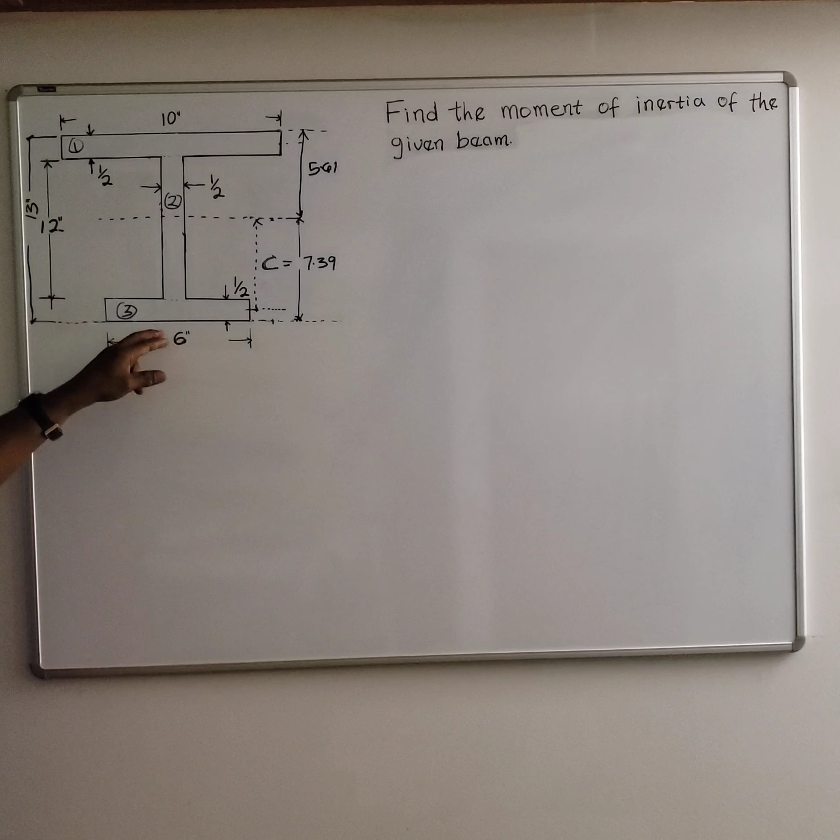And we noticed that the centroid along the y-axis is not in the center of the height of this beam because the beam is not symmetrical along this height. But along the x-axis, the centroid is symmetrical. The centroid is right in the center of this beam.

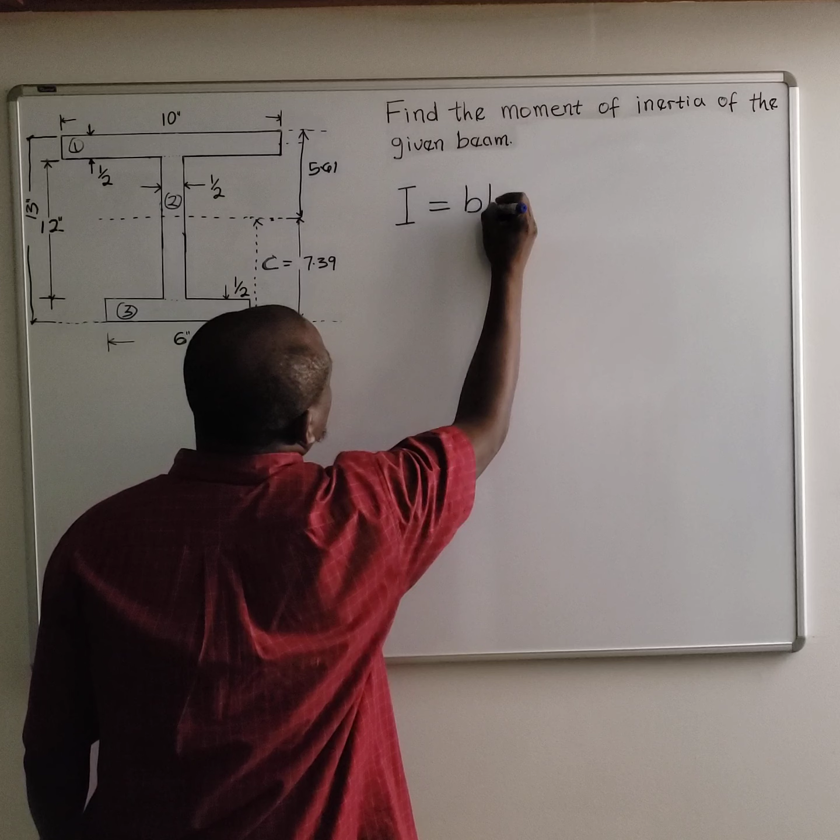As a result of that, we went through the whole procedure to calculate the centroid along the y-axis, and we are going to need that centroid to calculate the moment of inertia. We have three rectangular shapes that form this beam. We know the formula for moment of inertia for a rectangle is BH^3/12. So for a simple rectangle, that's the formula you need.

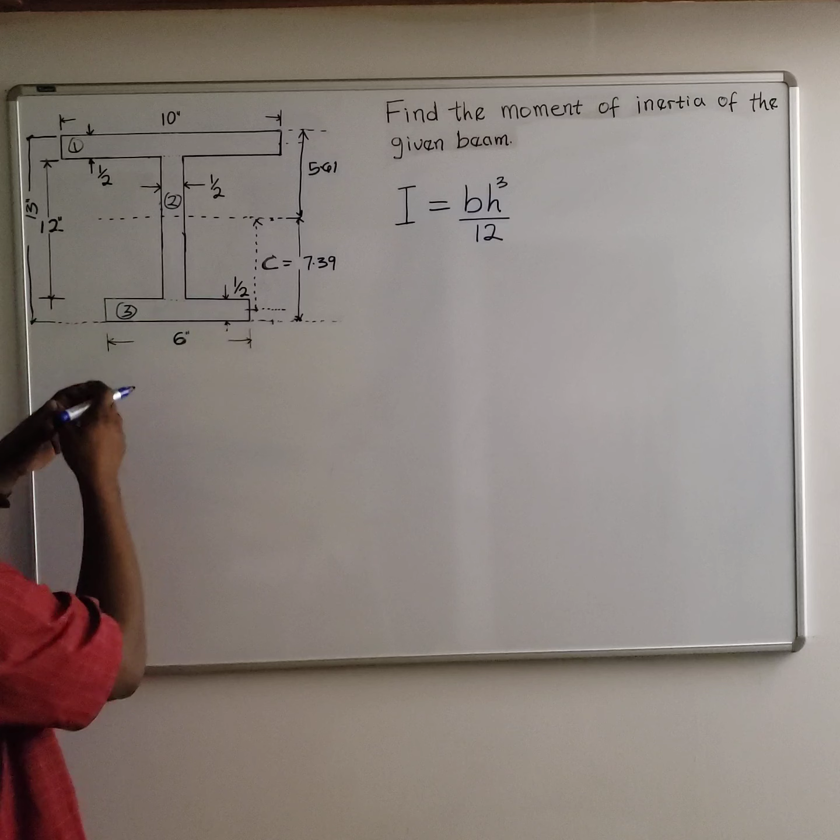But because we have a composite shape that is not symmetrical, we have to delve into a theorem called the parallel axis theorem. It says the area of a shape multiplied by the square of the distance between the overall centroid and the centroid of the particular shape. Since we already know the overall centroid as 7.39, we want to calculate the D for each of these shapes. Let's do that very quickly before we move forward.

For our first rectangle on the top, the centroid of this shape from here is 12.75 because the overall height is 13 and this is ½ inch. Half of this ½ inch is 0.25, so you subtract 0.25 from 13. That is 12.75. Now that 12.75 is greater than this centroid, so you subtract the centroid from that value. So D1 will be 12.75 minus this value, and that will give you 5.36 inches.

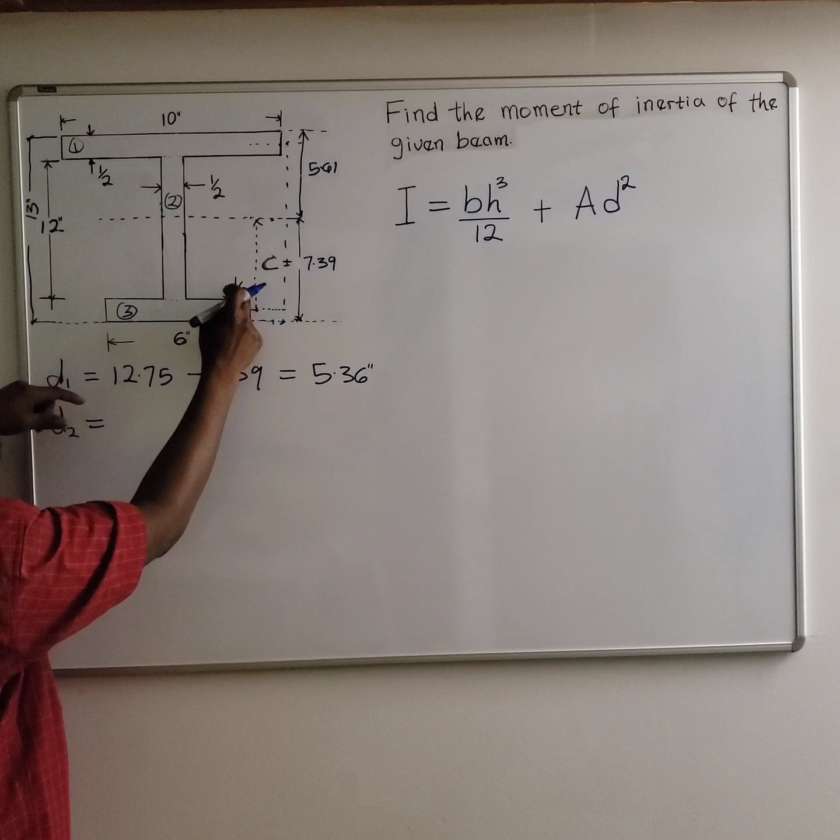For our D2, that's the second rectangle. The centroid of this shape from the bottom is 12 inches divided by 2, that's 6, plus this ½ inch, that is 6.5. So 6.5 minus 7.39, you are going to have negative 0.89.

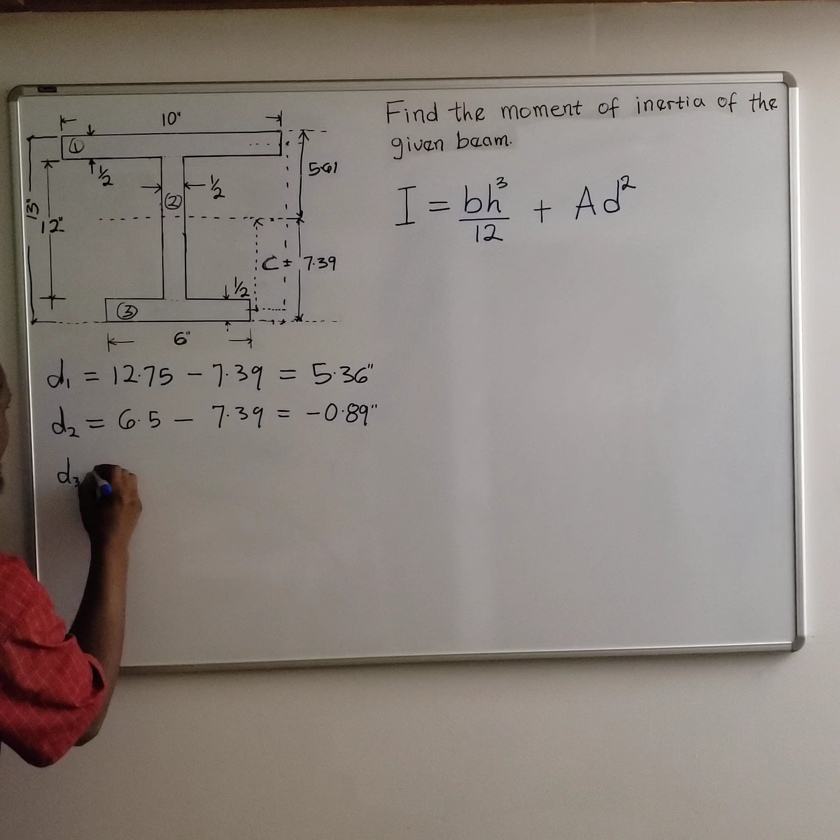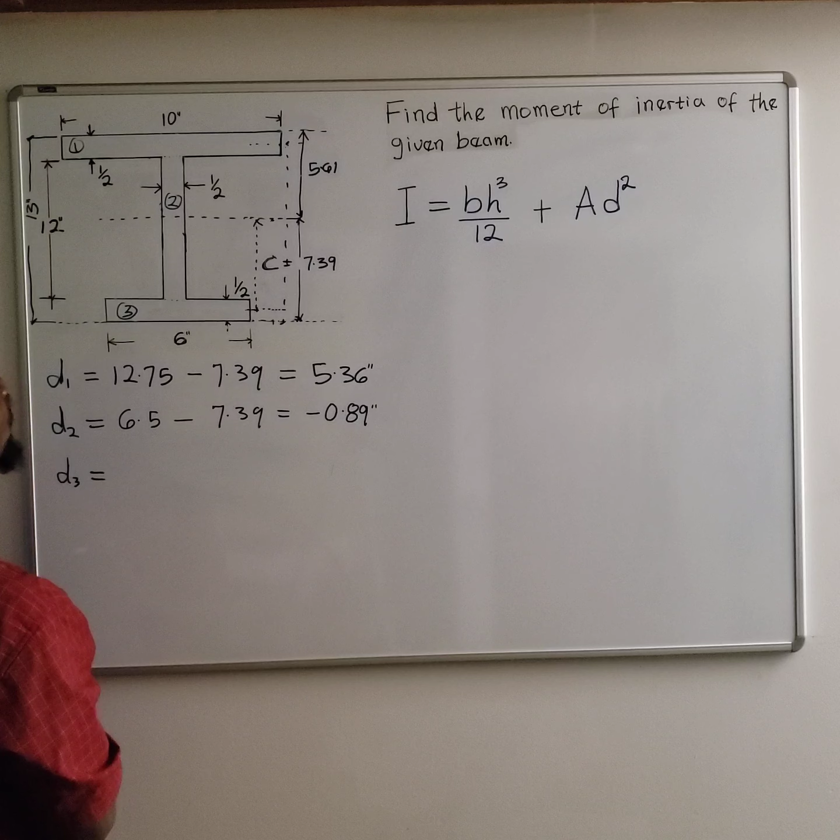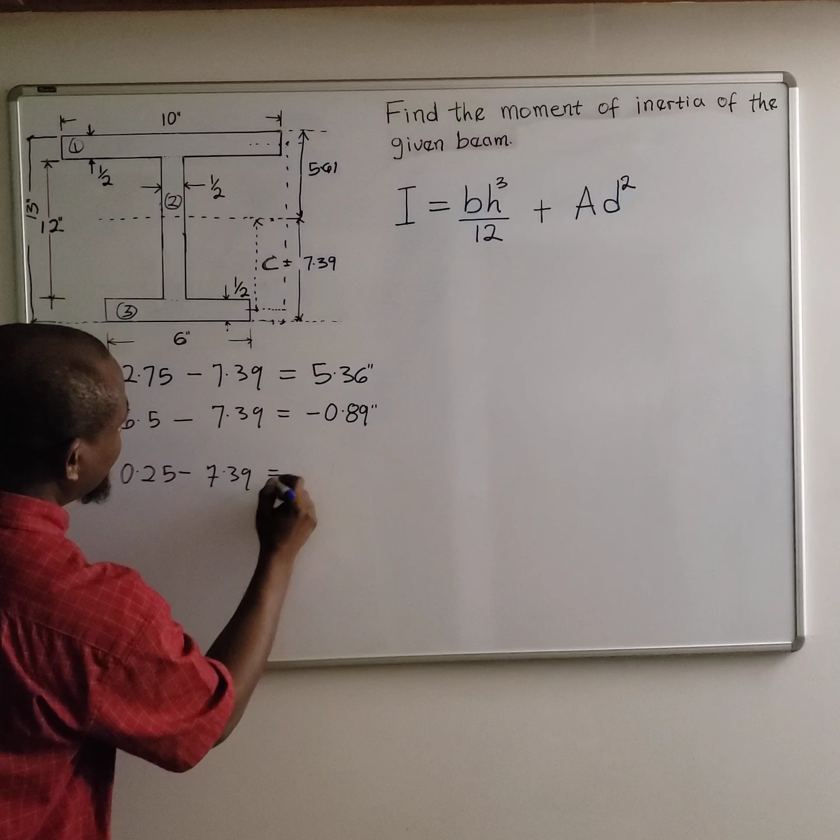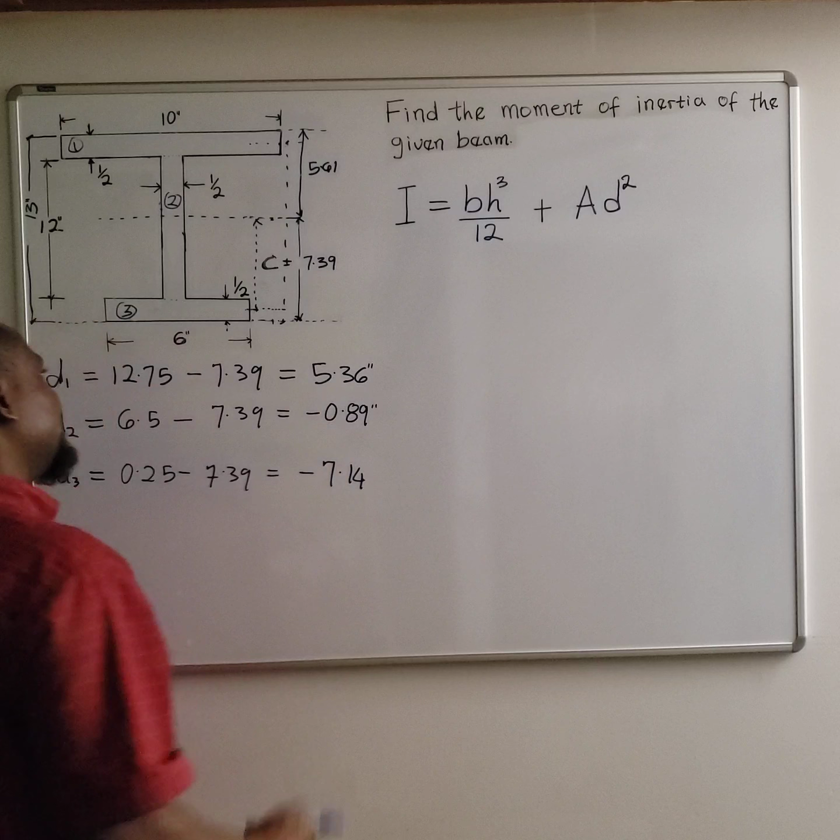And then for our D3, this is ½ inch, so to the middle of this rectangle that will be 0.25. So 0.25 minus 7.39, we are going to have negative 7.14. Now don't worry about the negative. As you can see, the distance d is squared, so when you square it, the negative signs disappear. So we know what those values are.

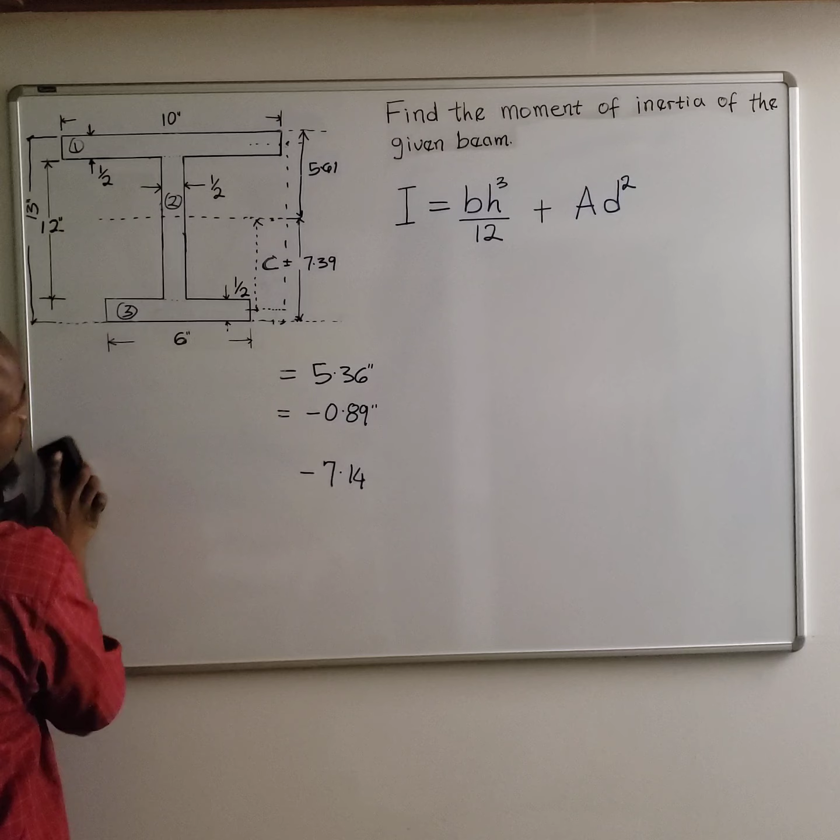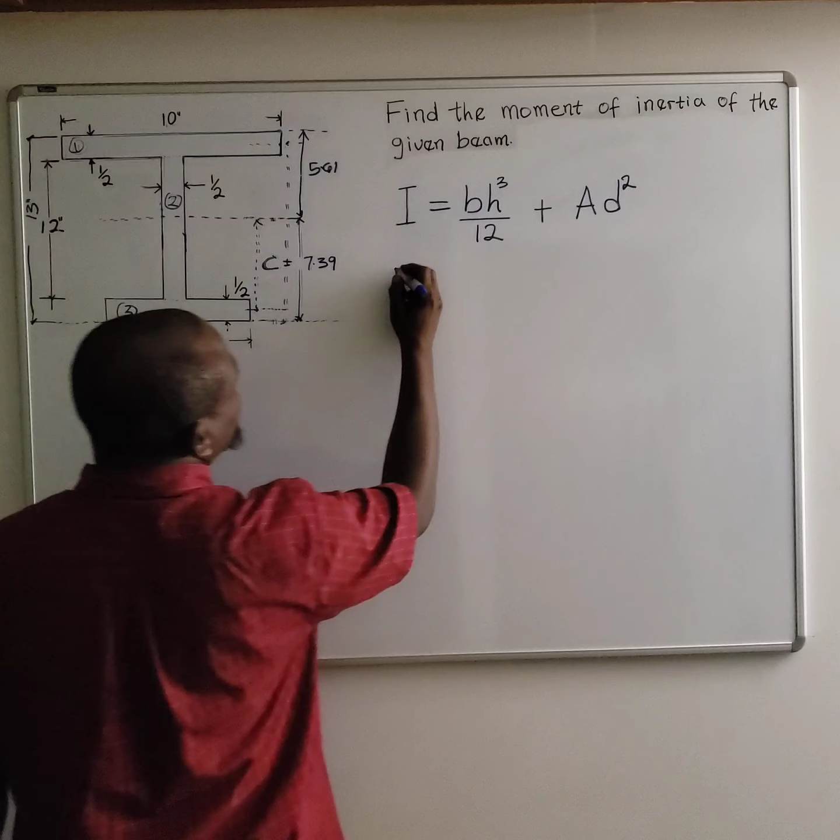We're going to need those values to calculate our moment of inertia. Just bear these values in mind. The total moment of inertia of this shape will be the sum of the moments of inertia of the individual shapes: I1 plus I2 plus I3. So let's start with our I1.

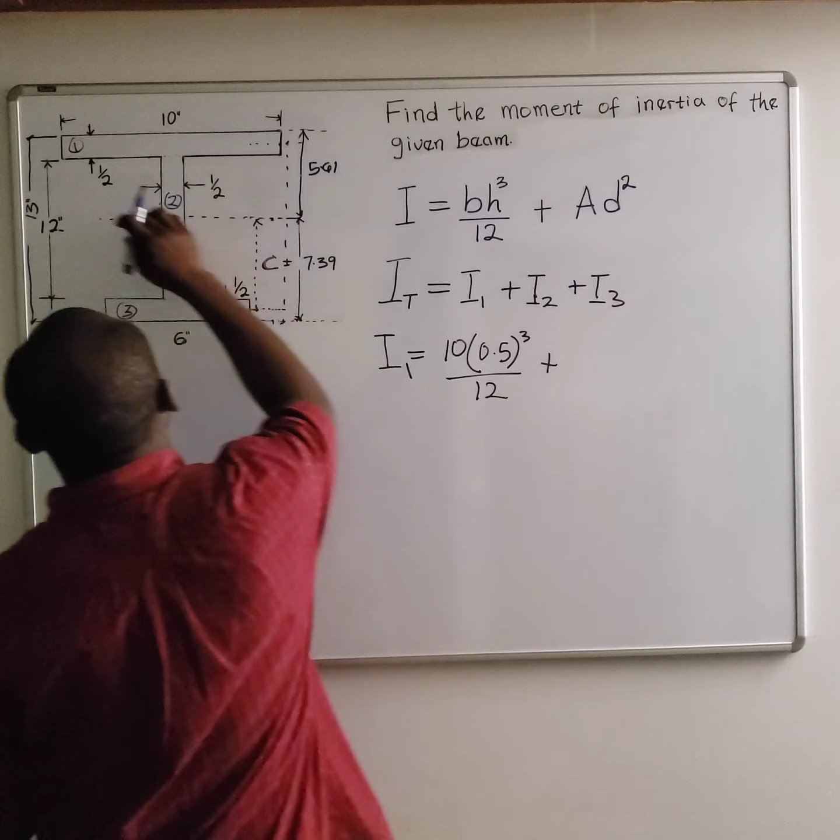You plug your values into this formula. Our B is 10, multiplied by h, which is half inch, raised to power 3, divided by 12, plus our parallel axis theorem. The area of this rectangle is 5, because 10 multiplied by half inch is 5. We already calculated D1 to be 5.36. You square that.

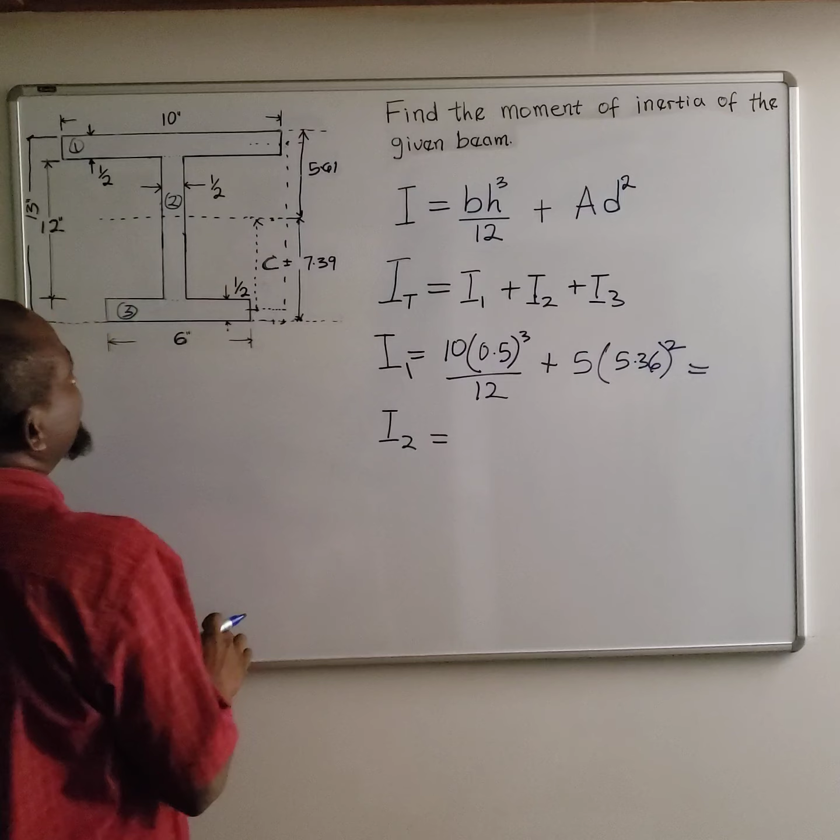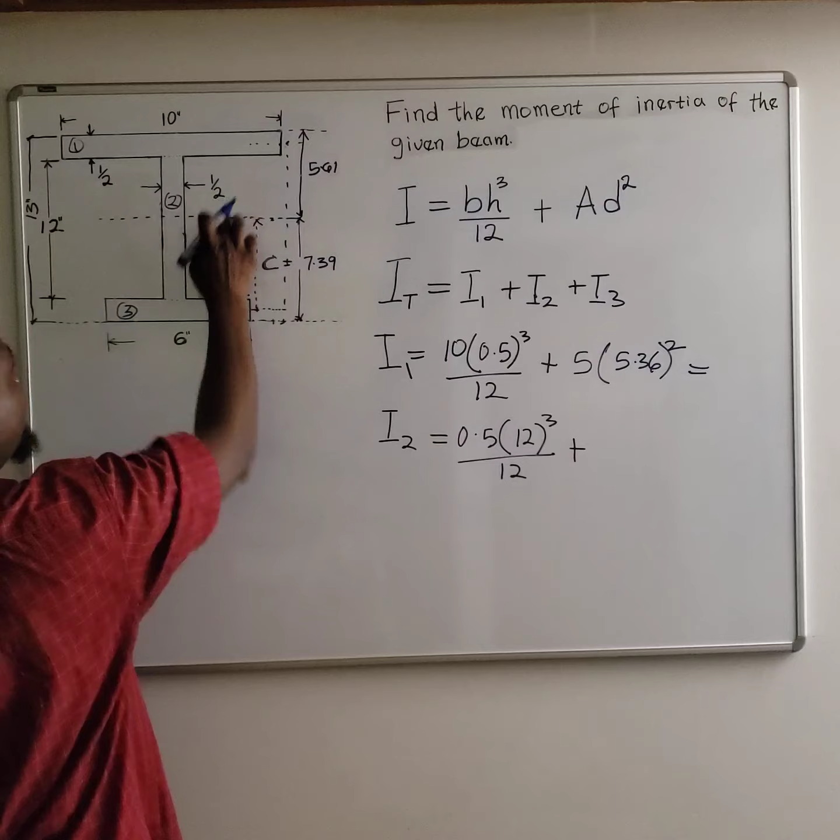Then our I2 will be: our B is half inch, 0.5, multiplied by the height of this rectangle, which is 12, raised to power 3, divided by 12, plus the area of this rectangle, 12 multiplied by half, that's 6. And we calculated our distance D as negative 0.89. You square that.

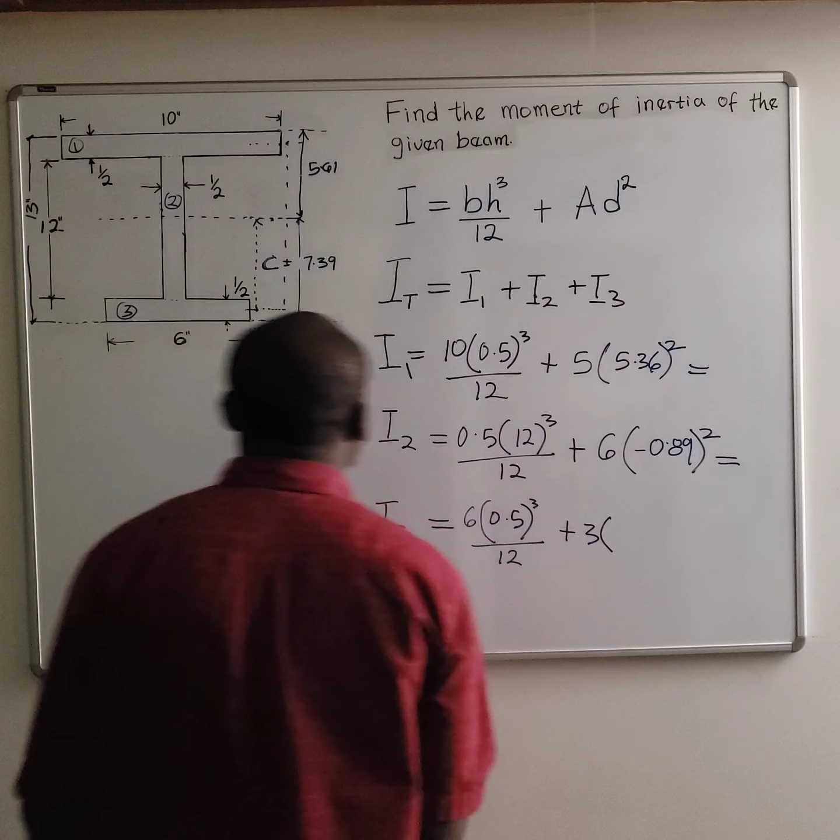And then our I3: our B will be 6, H will be half inch, raised to power 3, divided by 12, plus the area of this rectangle, which is 3 because 6 multiplied by half is 3. And we calculated our distance D to be negative 7.14. You square that.

So when you do this maths, you are going to have 143.7 inches to the fourth here, 76.7 inches to the fourth power here, and 153 inches to the fourth power over here. That's the moment of inertia of the individual shapes. But your overall moment of inertia, which is what we are looking for, is the sum of all of this.

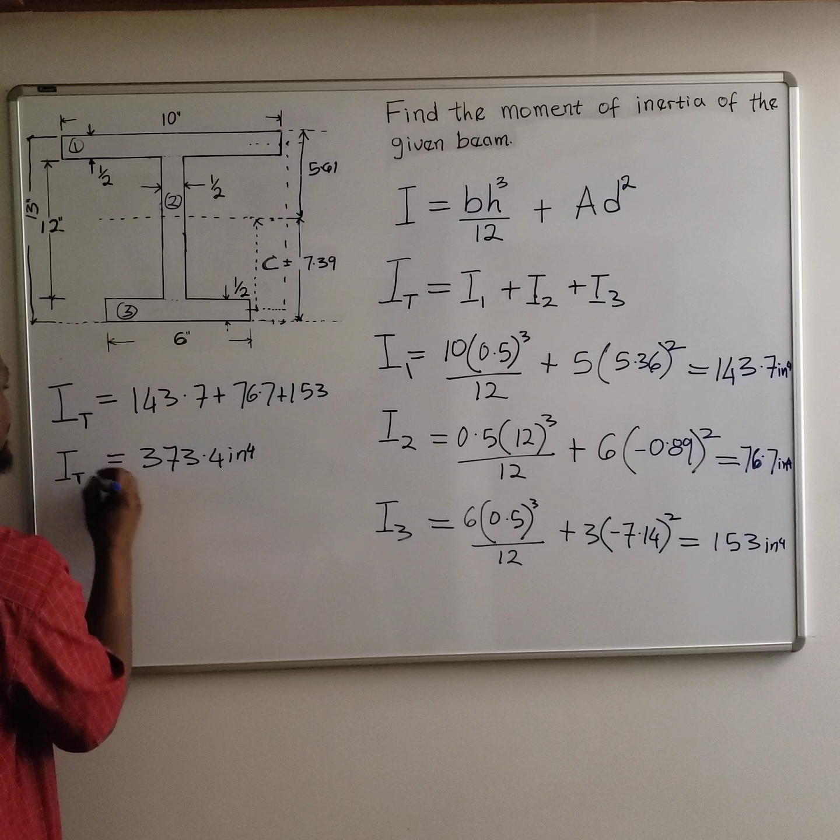When you sum 143.7 plus 76.7 plus 153 together, you are going to have 373.4 inches to the fourth power. That is your overall moment of inertia for these shapes.

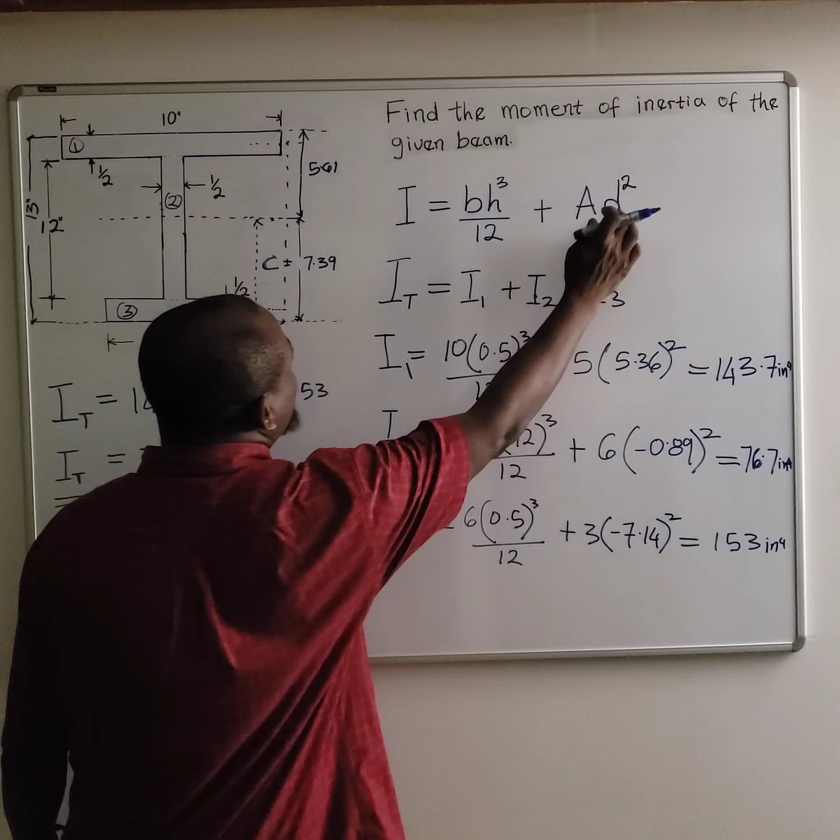So a very crucial part of this problem is to understand how to calculate your D. When you calculate D, don't worry about the negative sign. The negative sign will disappear by the time you square that value. And then the sum of all of that is your overall moment of inertia.